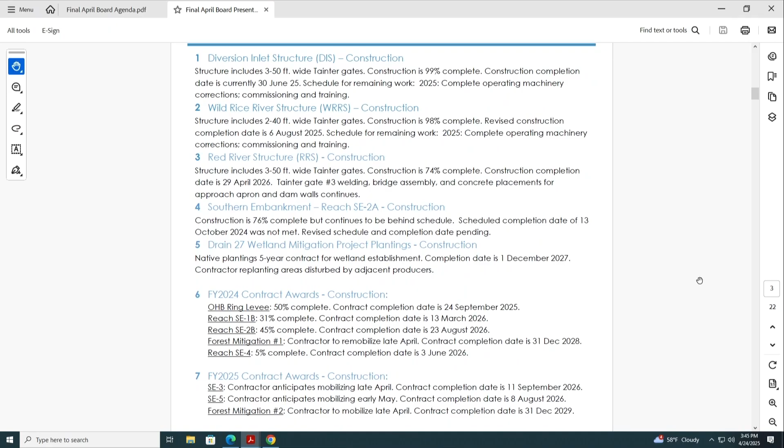Good afternoon, Chair Grindberg and board members. This is Terry Williams with the Corps' update for April. For the diversion inlet structure, the gate machinery install is ongoing, and it looks like we'll be commissioning that structure in May with firm dates to be set. Wild Rice River structure completion is in August. Commissioning and training is still TBD on that.

The Red River structure flyover is gorgeous, and it's really impressive to see now that the dam walls are being built, along with the bridge decking across those dam walls and the apron in front of the structure. SE2A, that contractor is supposed to be mobilizing any day, and they're being pushed to complete this work in August. Going down to all of our embankment contracts, our contractors have just mobilized or are preparing to do so for this construction season, and we should see the percent completes for these embankments rise dramatically this season. For the forest mitigation contracts 1 and 2, the same contractor got both, and I think they're starting to plant this week or next week at those sites.

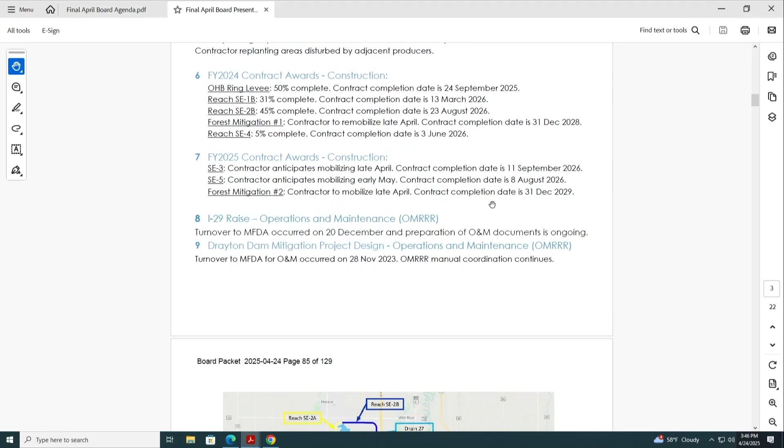With that ends my update unless there's any questions. Questions for Terry? Thank you. Next up, Chris Bakkegaard.

Thank you, Chair Grindberg, members of the Diversion Authority. Quick construction update today. A lot of the items will be covered in the drone video, so I'll try to gloss over just a few of the other items we don't cover. As Jason mentioned, the County Road 16/17 area will be closing as the Corps begins their work. That'll also lead into the start of Channel Reach 14, which coincides with that. Once the roadways are closed, the developer can start working in that area, and they plan to.

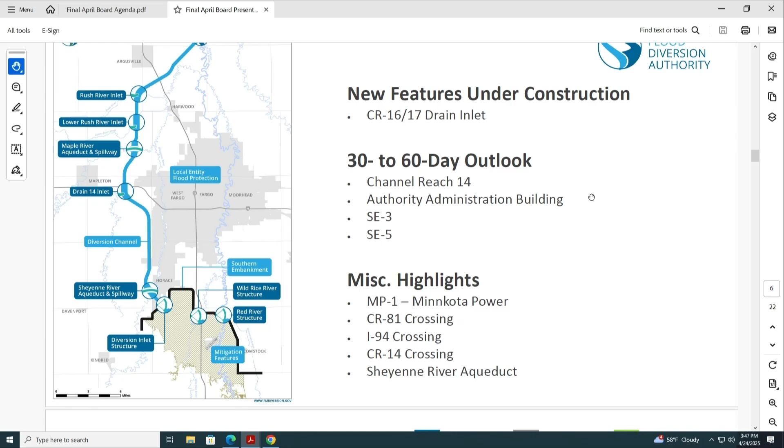The Authority Administration Building: for those on the Fargo City Commission, they did approve the plat for the rezoning and platting of the diversion site building, and now the developer is finalizing the construction permits, anticipating that work will also start here in the next 30 to 60 day window.

Questions? Okay. On the safety update, another good month for safety. There was one really minor recordable event: a finger got pinched between a couple pieces of form work. A minor injury, but otherwise another good safety month across the entire program.

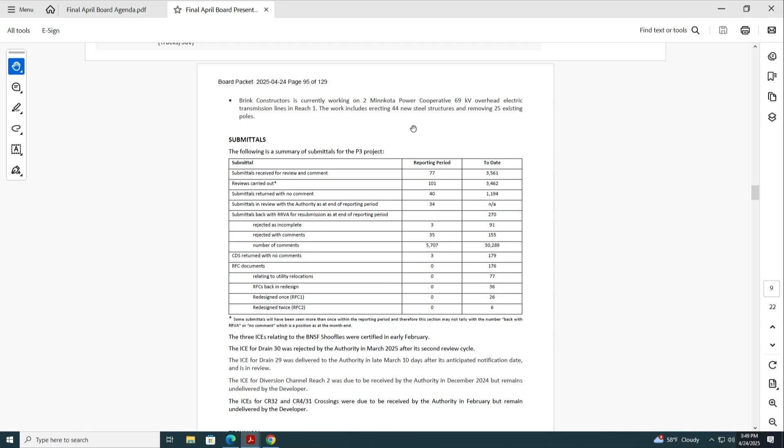Just the entire packet from the PMC and the overview of the P3 is in your packet, but I'd like to highlight a couple things, especially our technical and design review team. They are actually finishing up their work. We're pretty well complete with the designs.

A couple areas we've been focused on are access and security, the roadways, the various parking areas to allow public access into and around the diversion channel area. So we're finishing those designs up and those design reviews up.

The other area is a lot of work with the developer and the Corps on the aqueducts and the downstream meanders and some of the work there, finalizing that.

There's also been a lot of discussion with the developer on long-term operations and maintenance of the aqueducts, and how we can incorporate a design now that will work for operations and maintenance for the first 30 years while the developer maintains it, but then also long-term after that, so it will be a viable solution for the authority in the years after the developer leaves.

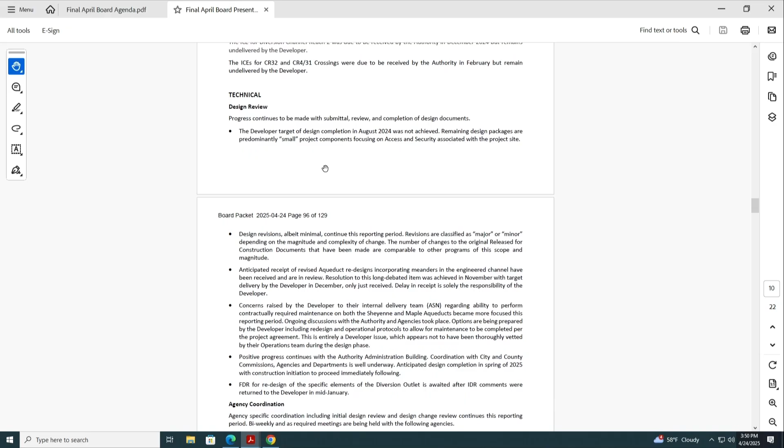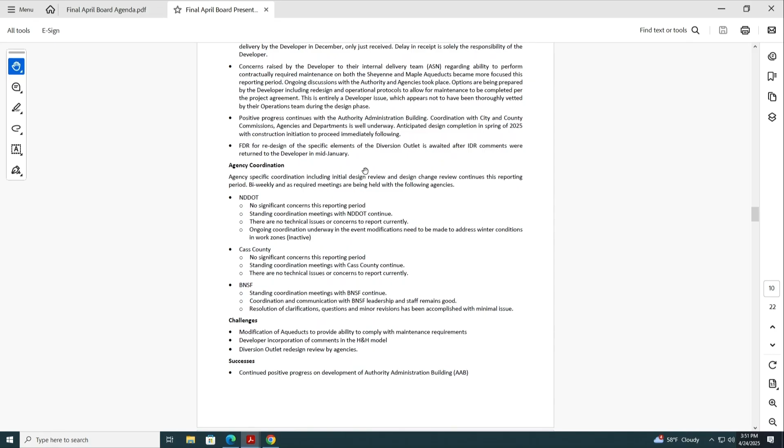They're very much involved with all the bridges and bridge oversight. Matt Stamness has been a great help from the county perspective, and so appreciate all the work he's been doing.

And finally, also with BNSF, with the four rail lines, the three crossings that we have with them. They and their engineering team have been on site all the time, and we've been coordinating with them on regular meetings. So focusing in on getting the project wrapped up and the project design wrapped up.

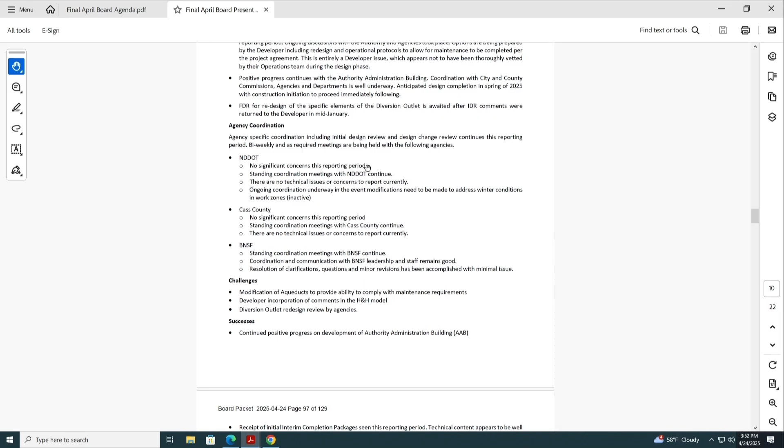So that we can continue to make any other minor modifications in the field, any field adjustments, and review those. Any questions on what our technical team has been working on? And then again, put the open invitation out there — if you see something in the packet, something you have questions on the P3, please feel free to reach out to either myself or Mr. Bakkegaard.

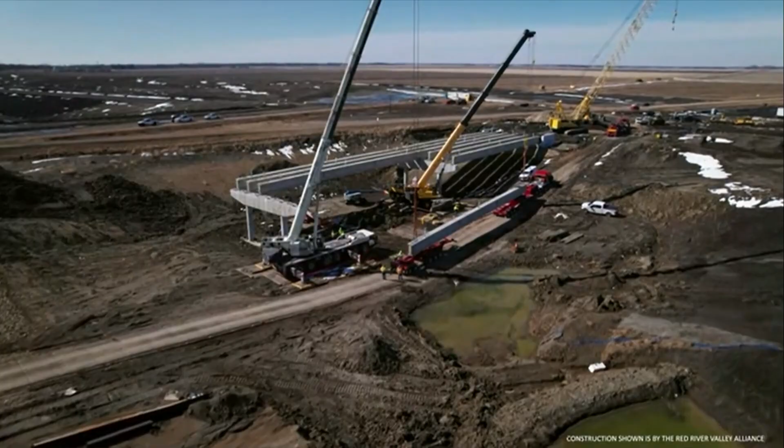Work on the Red River structure is about three-quarters complete after numerous portions were tackled by the contractor recently. I'm Tom Fuchs, Senior Construction Manager for the Metro Flood Diversion Authority, with those and other construction highlights for the month.

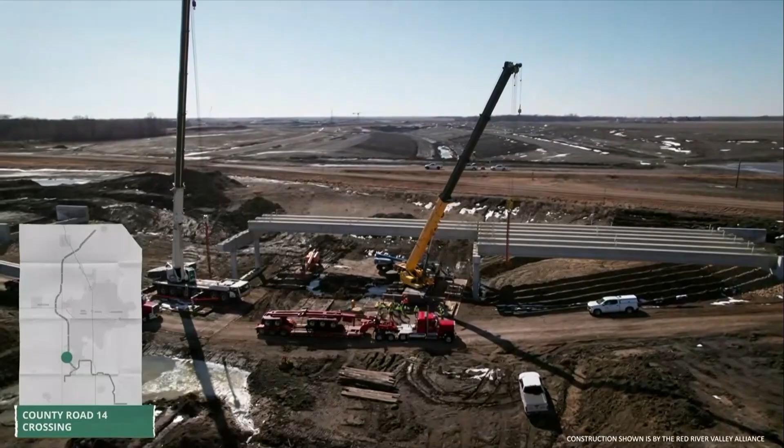Numerous crossings over the stormwater diversion channel are at various stages of construction. At County Road 14, just west of Horace, North Dakota, bridge girders were installed atop the completed bridge abutments and piers this last month. For all bridges to be built as part of the stormwater diversion channel, more than 500 girders are necessary, of which nearly half have been installed to date.

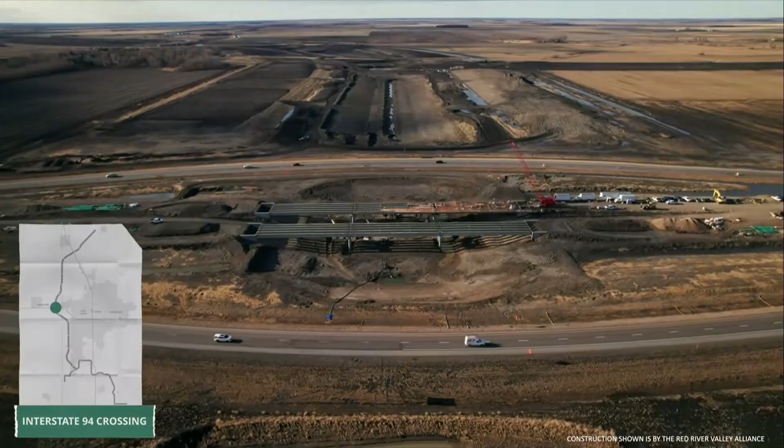On I-94 west of West Fargo, drivers will notice lane closures have resumed as work on this site picks back up for the season. With the concrete substructure elements completed and girders installed last fall for both the east and westbound bridges, RRVA is resuming its work installing falsework and decking in preparation for concrete placement in the coming months.

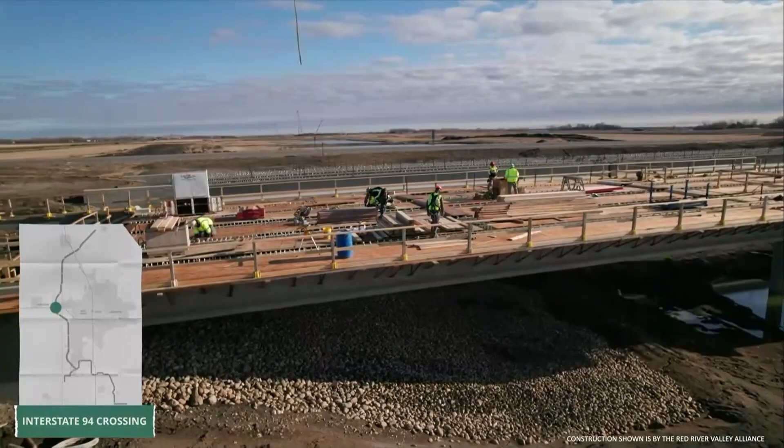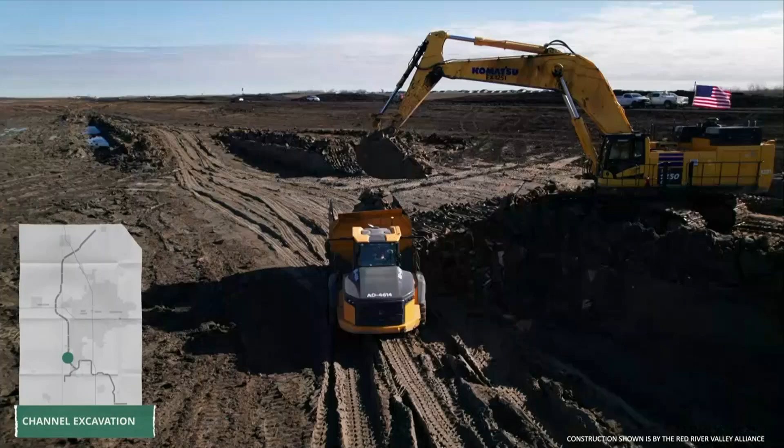19 bridges will eventually span the 30-mile channel, where Red River Valley Alliance has been excavating in reaches 12 and 13. Once the remaining frost is out of the ground, levee construction is anticipated to resume.

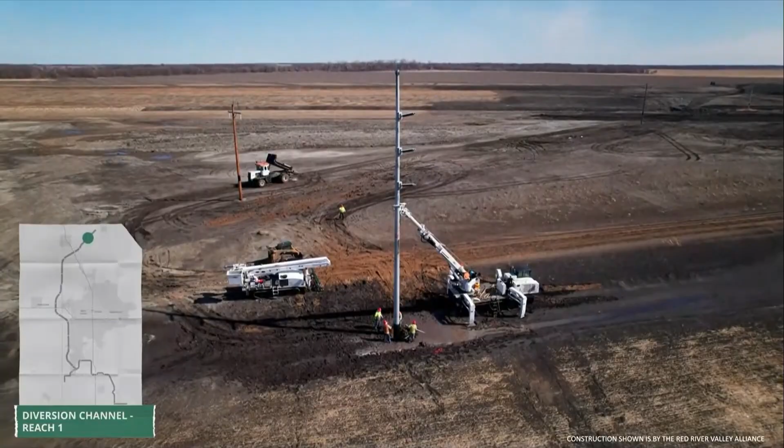In Reach 1 of the channel, work is now underway for the first of 12 overhead power utilities to be relocated as part of the stormwater diversion channel. Crews are installing steel poles for the Minn-Kota power transmission line, where it will cross the channel near the combined crossing for County Roads 4 and 31.

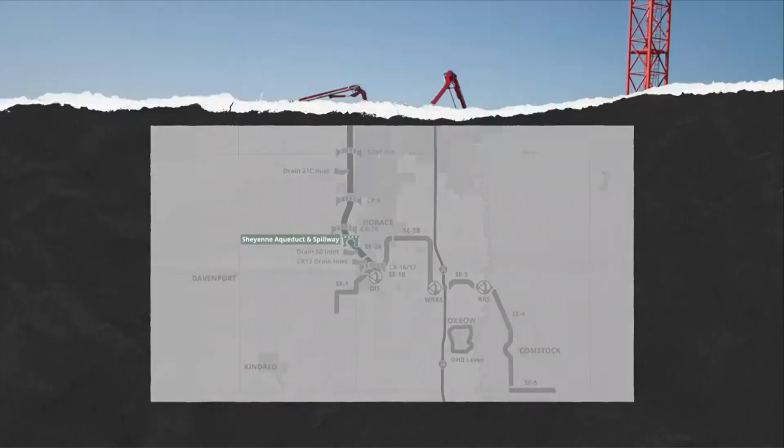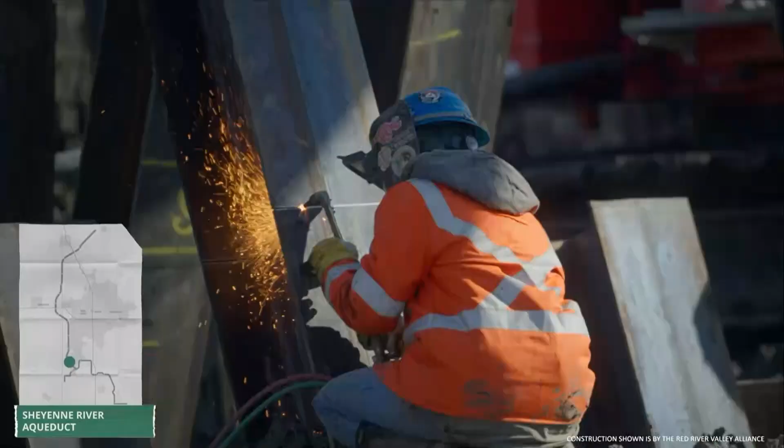As we move south to the Sheyenne River Aqueduct, we see the last large concrete placement for the aqueduct's flume and conduit base. ASN Constructors is also driving piling and placing concrete on the wing wall footings, and they've begun placing formwork and concrete at several of the flume's abutments and piers as well.

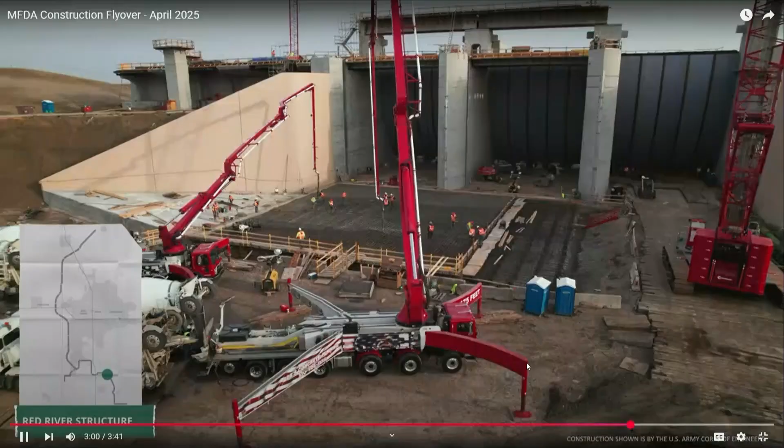The last stop on our drone tour this month is the massive Red River structure. Ames Construction, the U.S. Army Corps of Engineers contractor, has been working on many portions of the structure. They recently placed close to 1,500 cubic yards of concrete for a large portion of the structure's upstream approach apron. Concrete work continues at the structure's adjacent floodwalls as well.

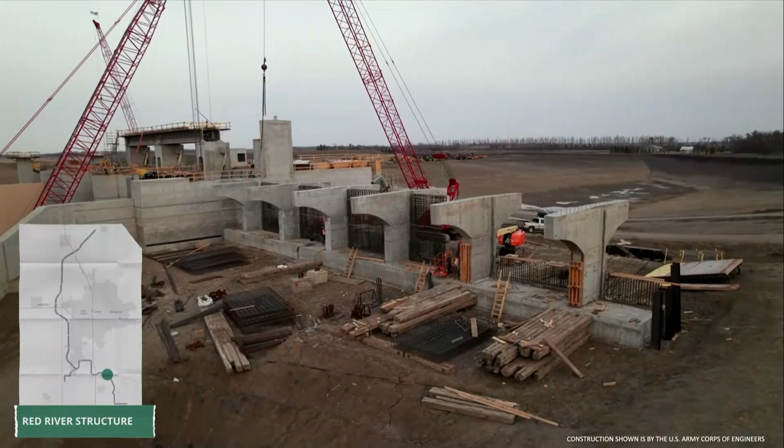East of the structure, we can see footings and piers underway, and west of the structure, crews recently placed a portion of the floodwall bridge deck.

Good afternoon, Mr. Chair and members of the board. There was really nothing out of the normal routine this past month. The March construction update received good coverage as well. We helped prepare for Governor Walz's visit with some of the collateral materials. And the newsletter got a lot of great feedback, especially by featuring Dr. Zimmerman and all of his history with flooding in the area and the project, and that really turned into a great piece. Beyond that, I just encourage you to keep an eye out on newsstands in another week for the Good Life magazine. Mr. Benson will be featured for all of his military service, and it's a very impressive career. So you'll have a chance to see a feature on him in that magazine coming up. With that, I'm open to any questions.

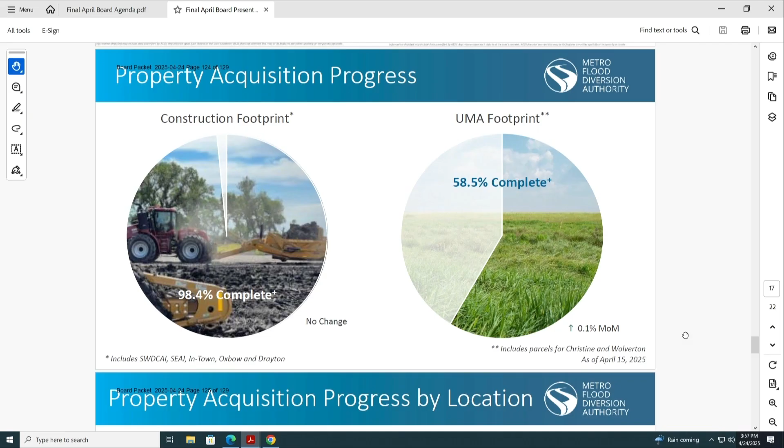On the right-hand side, we did have one parcel close in the upstream mitigation area, so again, we're inching closer and closer. This page breaks that down a little further. The only thing outstanding for the construction footprint is a few parcels in Minnesota where we've acquired the property right, but we haven't completed the valuation step in that process yet.

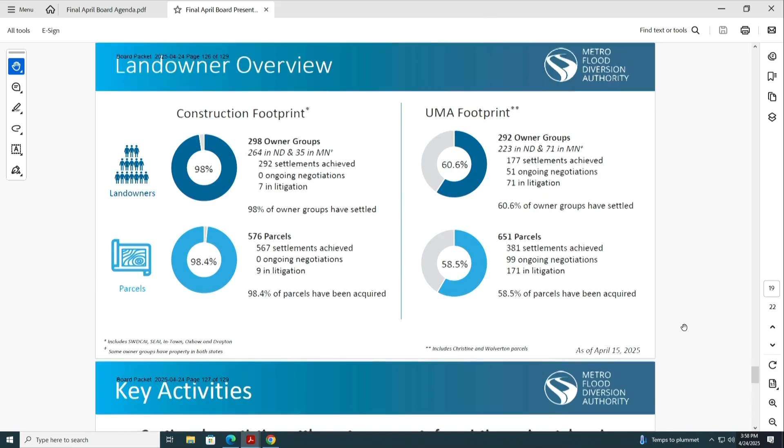Again, the upstream mitigation area, you saw that. Lots of numbers on that slide, depending if you like to look at the numbers by parcel or by owner. Multiple owners, several owning more than one parcel, and that's the background behind that slide.

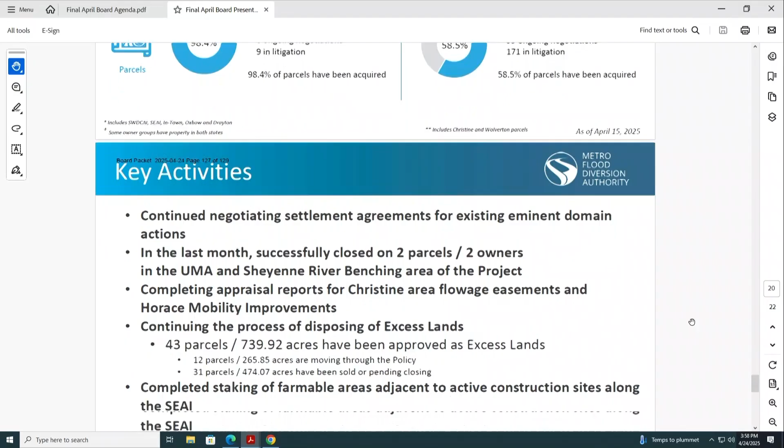In the last month, our land agent teams and lands program team have been busy with a lot of the same activities as the last few months, trying to negotiate settlements where we can. We did close on two parcels, one in the upstream area, one for the Sheyenne benching project. We're down to less than a handful of appraisals to complete for the entire project, so we're looking forward to that day — hopefully here in early May, we'll complete all those.

We are continuing to manage the disposal of excess lands. That's really consuming quite a bit of effort over the last few months, working with some sections of the Horace Rail Corridor and other pieces of excess land scattered across the project.

In the last month, we did stake some of the areas next to construction, wanting to make sure the farmers know where they should and should not be planting, so hopefully we avoid any conflicts that way. And then there are some occupied properties in Minnesota that we've been working with those owners to issue vacate notices and make sure they're moving out of harm's way as we get ready to relocate those structures.